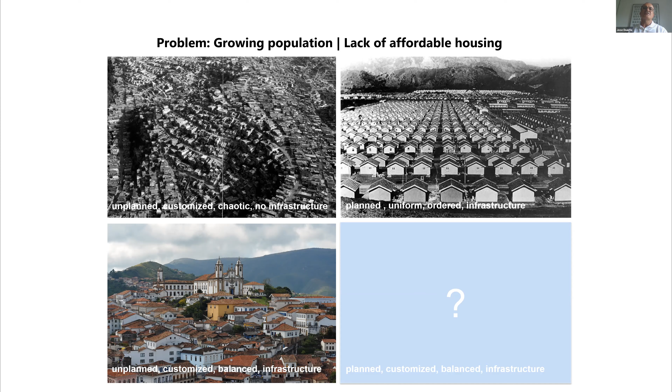So what we would like to have is actually what you see at the bottom on the left side, which is that we would like to build settlements with the qualities that we perceive and value in the settlements that grew incrementally over time. So what is the solution? How can we design environments that have the richness and work well like these historical settlements that become very often touristic attractions? So this slide shows the DNA code, which is the code of life.

And the idea is if you tweak the code a little bit, you end up with a different living creature. And the idea is that this does not happen randomly. It happens in a way that the creatures evolve to become the fittest to the environment where they live.

So this is the idea that we want to bring into architecture: the code to generate buildings that are the fittest for the environment where they are built.

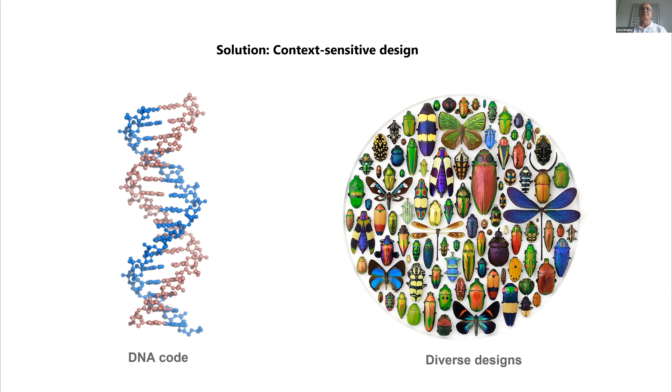It just happens that this is not new. If you look back into the history of architecture, you see books written, some of them thousands of years ago, where people describe very rigorously how to design buildings. This is done in such a way that it's more or less straightforward to convert those instructions into computer programs able to generate 3D models of a building.

So what you see on the screen is actually the output of a computer program that some of my students wrote a few years ago that converts a famous book on architecture, written by Vitruvius, a famous Roman architect 2,000 years ago. He has one chapter that describes how to design Roman theaters.

So what the computer program does is, if you specify the number of spectators, it will generate in a matter of seconds a 3D model of a theater according to Roman rules for that number—for 5,000 or for 15,000, for instance. So we have a computer program able to generate customized designs. Then we use digital fabrication, or in this case rapid prototyping, to very quickly produce a 3D physical model of the output.

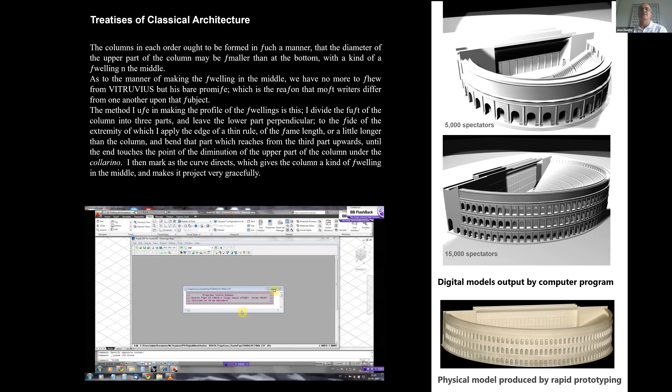So this is basically what we are advocating to solve the problem of building many houses in a short period of time, customized to satisfy the requirements of their users. The problem actually requires two systems: a design system that takes information about the context and outputs a design solution, and a production system, as we'll see.

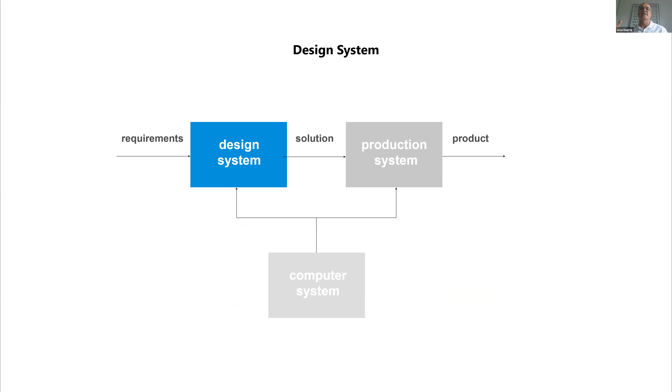The idea is that we use computers, the high processing power of computers, to very quickly process data about the site and generate data about the solution.

If you look more closely into the design system, it has the ability to interpret the context and generate a design brief—we have a system for doing that. We have another system able to generate candidate solutions, and then a system able to rate and rank those solutions. The idea is that we use search and optimization to find the optimal solution for a particular context.

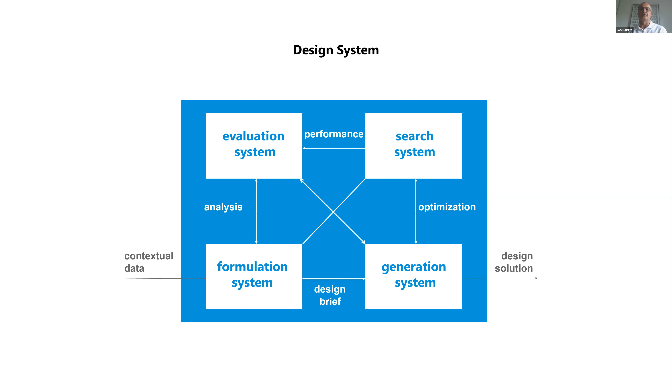In terms of the design of housing, this means the ability for people to design houses themselves. What you see on the screen is an interface we developed at the center a few years ago, an interactive tabletop that anyone can use to design their own customized house.

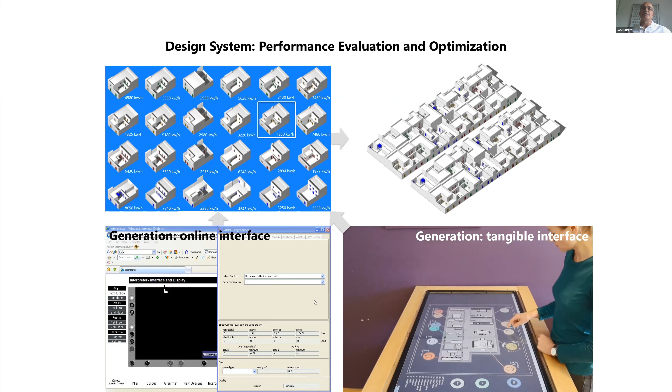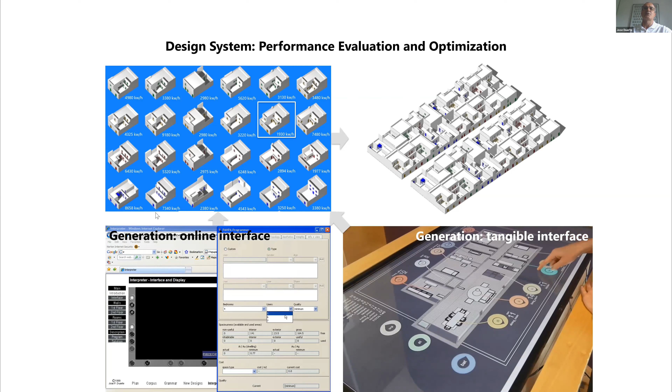The interface can be developed in many ways. For instance, in this case, what you see is another type of interface that runs on the web—like a virtual architect that asks you questions and will generate a house. With these systems, you are able to generate customized houses.

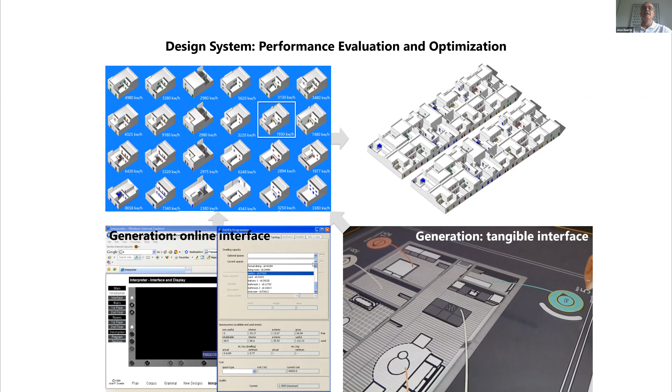This particular system has the ability to generate 67 million different houses. This means you can create very diverse environments—you have some of the qualities you value in informal settlements, but at the same time you can guarantee they will have infrastructure and public spaces.

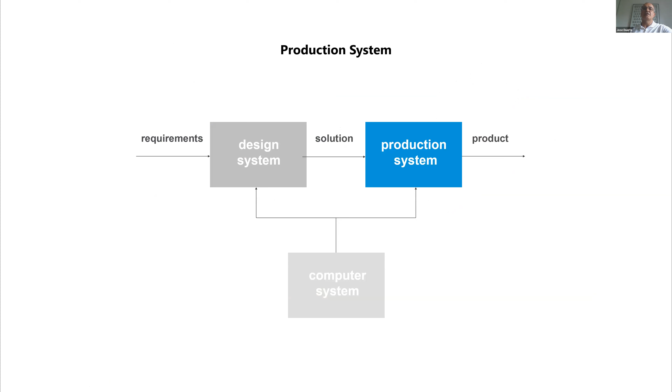So once you have the ability to generate customized solutions, you also need tools to materialize them—you need a production system. The idea is to use digital fabrication and digital construction to very quickly, efficiently and rigorously materialize those solutions.

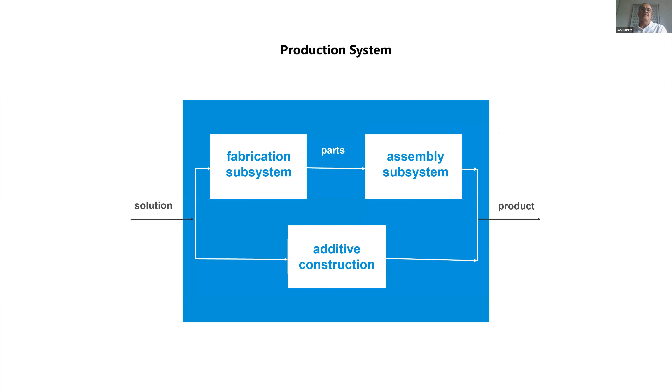These systems can take at least two forms. In one, you have what we call a kit of parts: you produce standard components and combine them in different ways to assemble the house. There's another, more modern solution—to use additive construction to very quickly print the building, as we will see. So these are the two paradigms: the kit of parts, combining standard components into different houses in different ways.

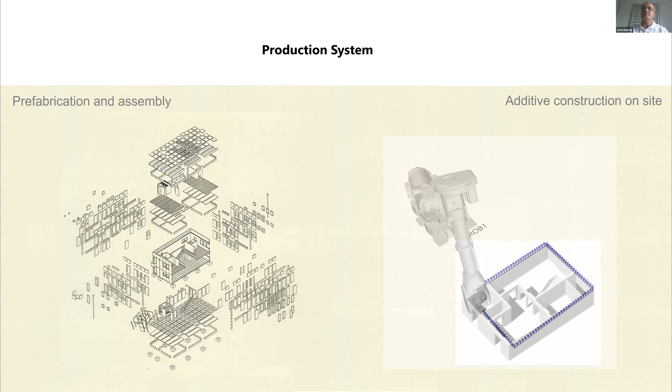And the other one is to use a robot to print the house—large scale 3D printing. That's basically what we have been developing.

This is quite interesting because you can use this strategy on many different scales—to design the house, the urban environment, but also the materials. For instance, in this particular case, you see a system we developed to design what we call a functionally graded concrete. If you look at human bones, their density is not homogeneous; they are denser when they need to be stronger.

This is the idea we use to develop a customized building component. Concrete has a binder, usually cement, and aggregates, usually sand. But you can replace part of the sand with a lightweight aggregate, and therefore change the properties of the building component. So it can be stronger and heavier where it needs to be stronger, or lighter and have higher thermal insulating properties.

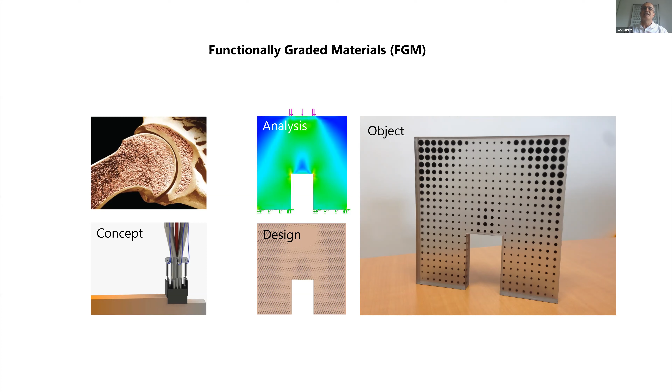So what you see in this image is actually a customized wall. You see it's denser where the loads are stronger and lighter where they are smaller. And then we developed the system to be able to materialize this.

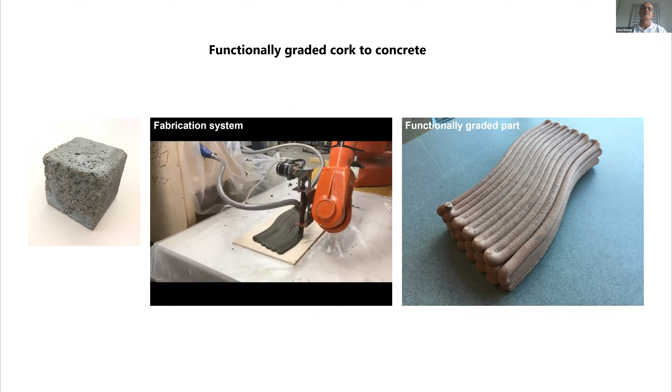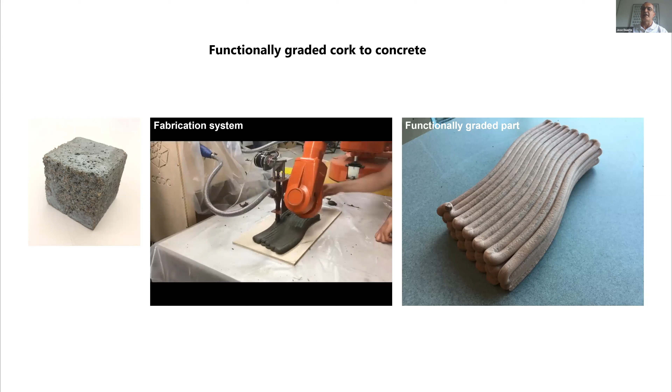What you see here in this animation is the printing of functionally graded concrete. The concrete being printed is not homogeneous, it does not have the same composition. The composition at each point is customized so it performs its function as best as possible. On one side you see it's 100% sand as aggregate; on the other, part of this sand was replaced by cork granules.

So you can also design a customized material. A colleague of mine, Shadi Nazarian, developed the ability to transition seamlessly between concrete and glass. This means you can actually have windows without frames, which simplifies construction, decreases the number of trades required to build a building, and decreases cost while increasing efficiency.

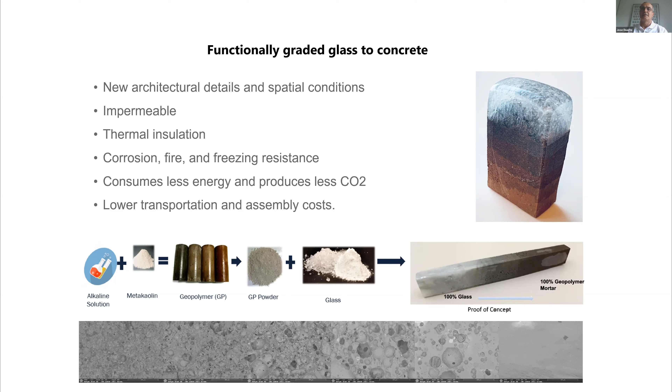But printing in concrete is a very complex endeavor. There are many different variables associated with different parts of the system. You have variables connected to the environment, like air temperature and humidity, and variables connected to the composition of the concrete we are using.

And then their properties, like viscosity, flowability, setting time, and so on. You also have variables connected to the printing system, like how fast you print, the size of the nozzle, and things like this. Because the material and printing system constrain what you can do, you also have variables associated with the design.

So the printing system constrains design, but at the same time it allows you to print concrete buildings without formwork, which makes construction a lot cheaper and faster. So there are many advantages in doing that.

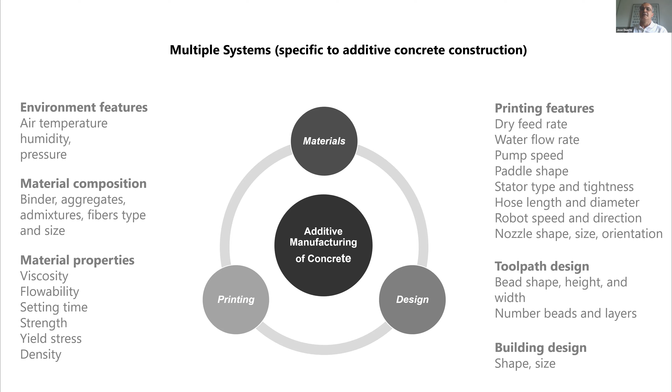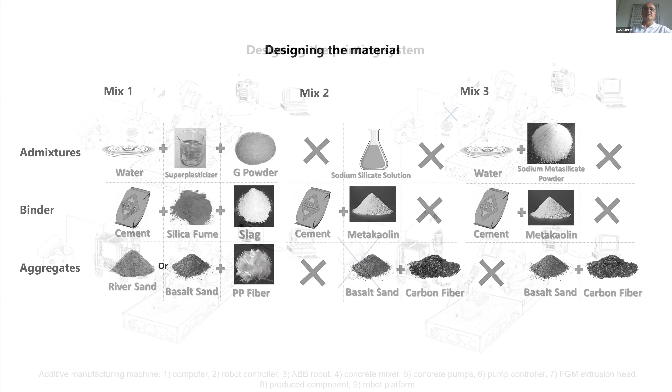This is exactly what I've been doing at the Additive Construction Lab. We are developing different concrete mixes that are printable for 3D printing. We are developing the printing system so it can take different configurations. And we are also understanding how the material behaves once printed, because concrete is not like plastic that hardens very fast.

Concrete takes some time, so when it's deposited, it deforms. We need to model this deformation so that we end up with a part matching the design we wanted. So we need to compensate for material deformation to get an accurate shape.

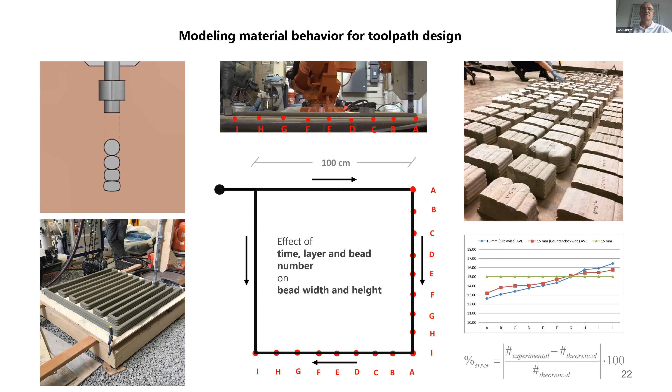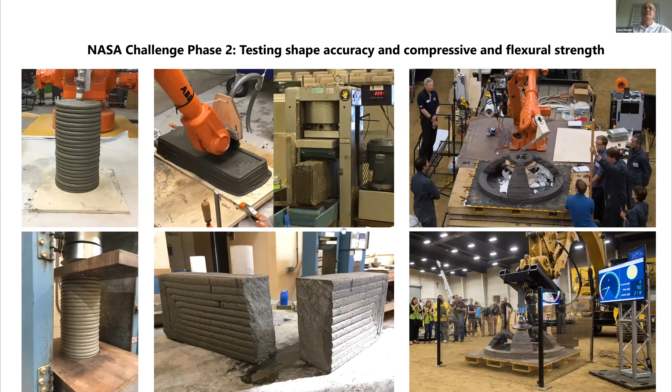This is another stream of research. You need to make sure concrete has the right strength so it will not collapse during or after printing. We also need to develop the ability to make it completely sealed, and the ability to incorporate openings like we see in this case, where another robot is used to place the window frame during printing. We need the ability to introduce reinforcement and make sure the concrete can endure successive freeze-thaw cycles.

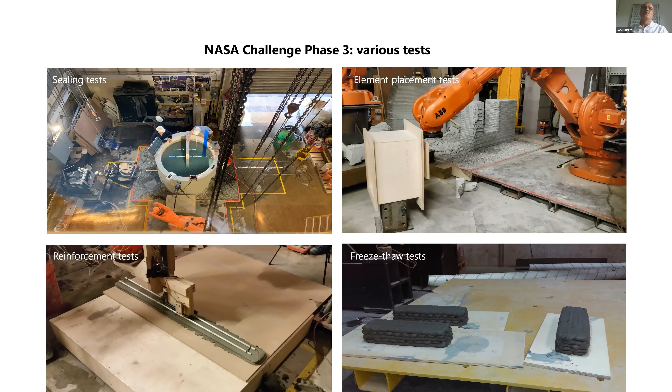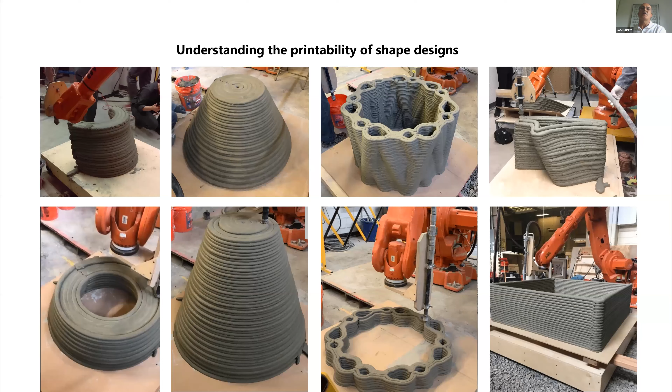We also need to understand which kinds of shapes can be 3D printed without formwork, because this does not work with any shape. There's a correlation between the features of the system and the features of the design, but what you can do is still a lot. The class of shapes, the variety of shapes, is actually very large. So this is also what we are trying to understand: what are the possible forms, and how can we best take advantage of the printing system in concrete to make buildings. We are developing the technology to avoid formwork, just to make construction simpler and faster.

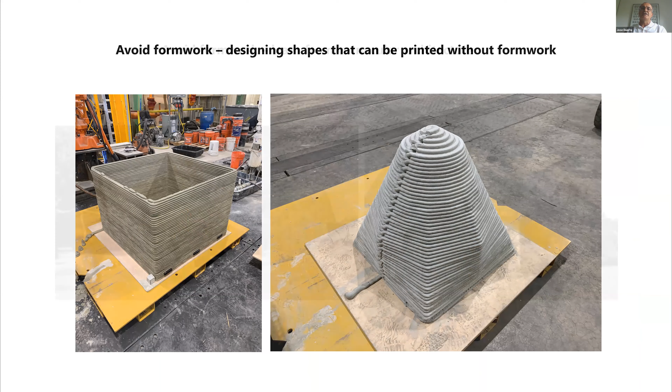So what you see in this case is actually a dome shape, a fully enclosed structure that was designed and built by one of the students of the class that we teach about the technology. And if you look back into vernacular architecture, the architecture built by people over time, you see that they had to deal with similar constraints.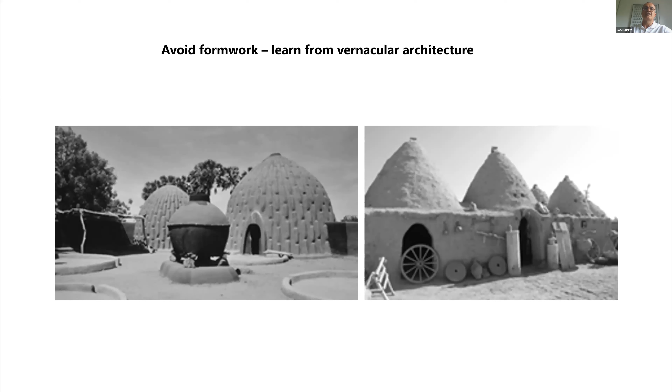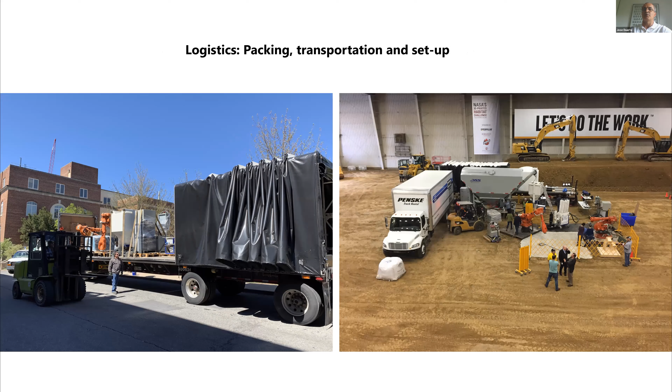What we're trying to understand is to learn from history, to find out which kind of shapes we can build and design. And because we are talking about moving to different places, we also need to be concerned with logistics: how to pack the system, how to actually set it up on site so it works efficiently.

So a few years ago, and last year, we participated in a NASA competition whose goal was to design houses for Mars that were 3D printed. It had two parallel streams: in one, we had to design the system for Mars; in the other, we had to use the same system to build on Earth. So what did we do?

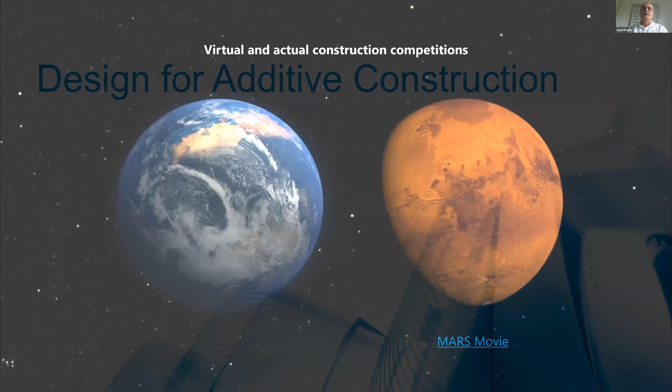We developed a platform that uses BIM. BIM is a standard of the industry, Building Information Modeling, and there are software built according to these standards. Our system has the ability to generate different solutions, and we are using parametric design for doing that.

Then we need to check the performance of the solutions from different viewpoints: structural, environmental, and constructability. And then we need a system to find the optimal solution for the context, the one that works better. Because we need to articulate the work of different robots, we need to do construction simulation to make sure they don't collide while printing.

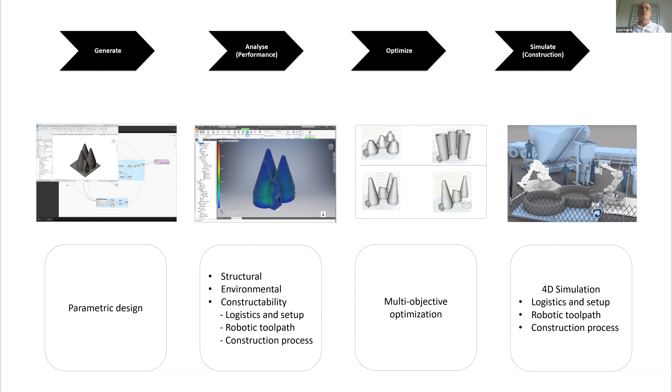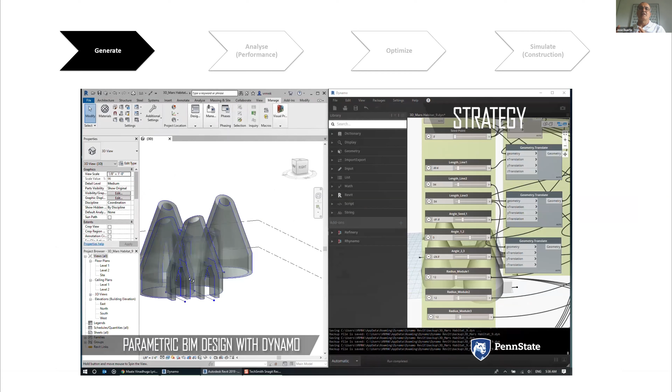So what you see here in this slide is the system showing how you can use parametric design to design shapes, different configurations for the shelter. We developed a design system based on modules, and those modules incorporate the rules of 3D printing. The constraints are imposed by the printing system and the material we're using for printing, and that limits what we can do, but it's still a very large range of possible solutions.

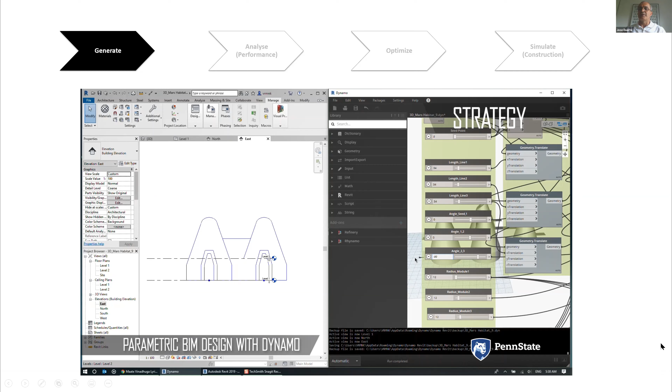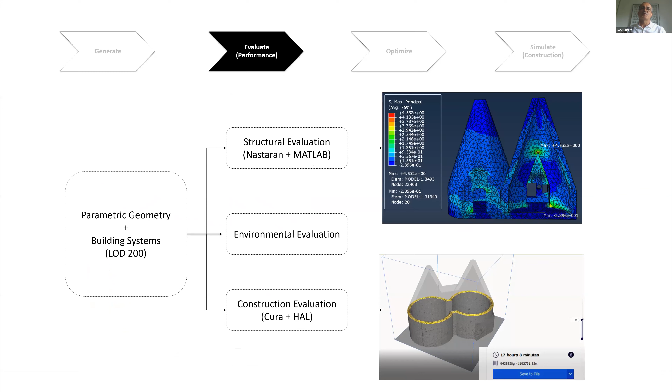So you can get the solution, and then check its performance from the structural viewpoint, the environmental viewpoint, or the constructability viewpoint. And then you can use optimization to actually find the optimal solution.

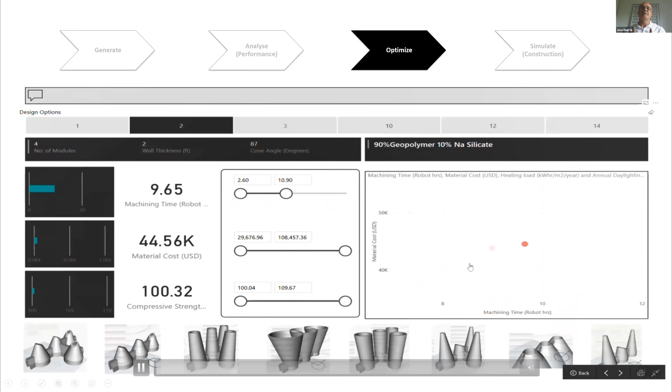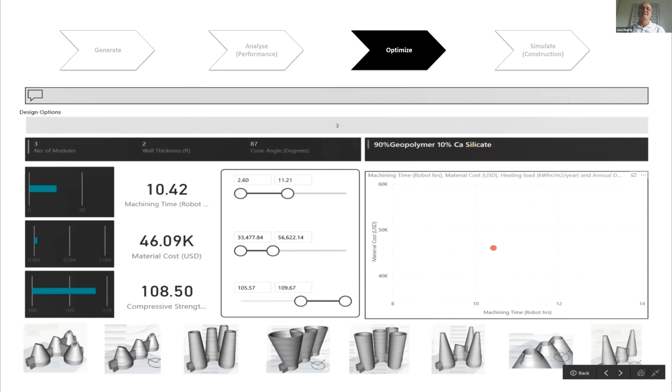So what you see in this animation is the system at work. It goes through different cycles, generates different candidate solutions, checks them, and evolves to the next stage until it finds the solution that's best for the particular context.

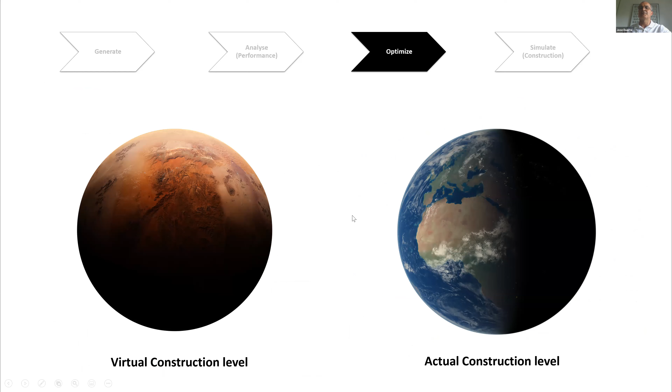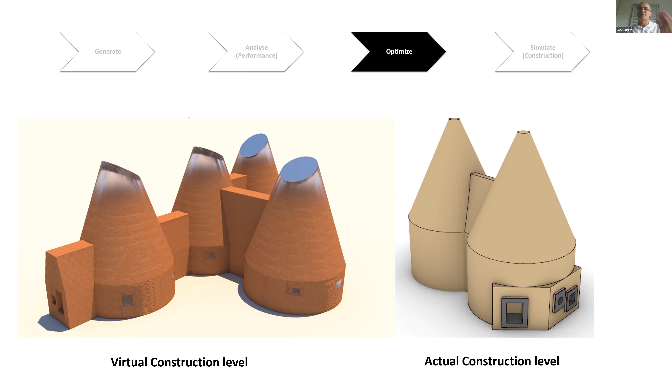Because we are using the same platform to design for two totally different environments, as you can guess, the outcome for Earth is different from the outcome for Mars. The same system generates different buildings because gravity, atmospheric pressure, and so on are different on the two planets. On Mars, the gravity is much lower, so we need to be more concerned with lateral loads because the structure needs to be pressurized, whereas on Earth the vertical loads are more important. So that's why the buildings have different shapes.

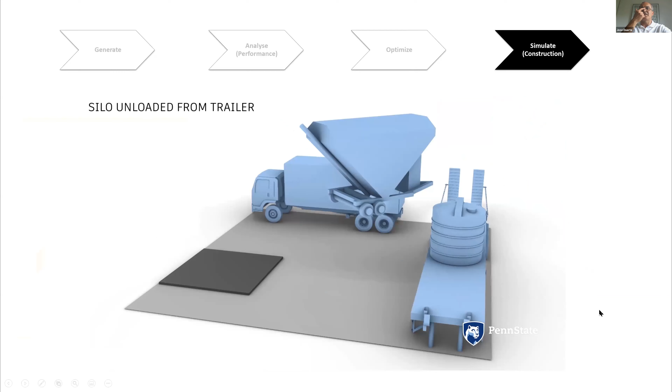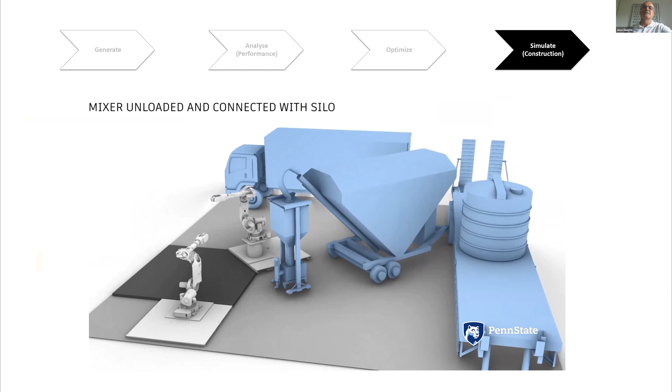So what you see now in this animation is the simulation of the setup, because to qualify for the final stage of the competition, we had to show that we could print. This is the animation we submitted to show how we were thinking about printing the structure on site, and there were constraints like the maximum area we could occupy.

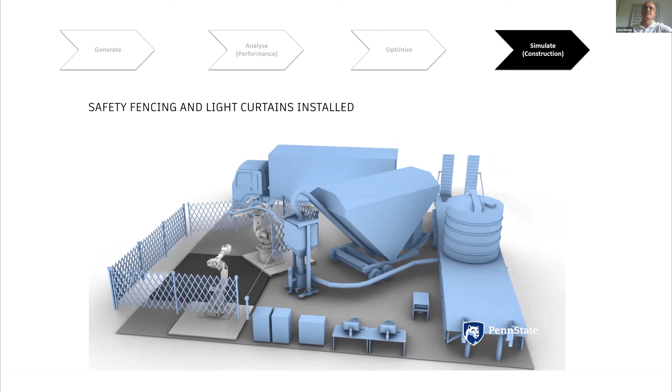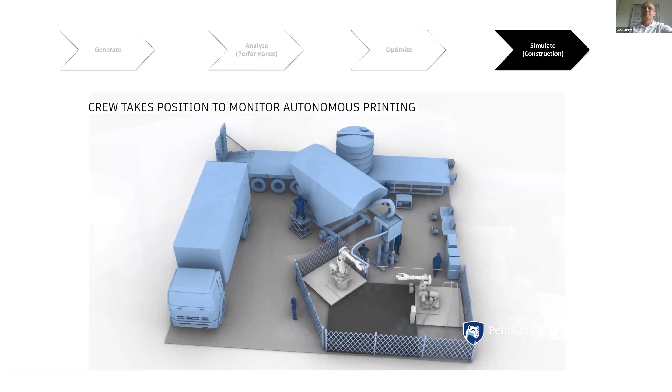So what you see here is the printing system. And what we are doing now is developing a product that can be used by industry, benefiting from the research we developed for the NASA competition. So you see the simulation of the setup, and now a simulation of the building being printed before the actual competition.

This was done for the virtual competition. You see that the second robot will place the windows at some points -- I think it's going to happen now, as you can see -- and then it continues printing.

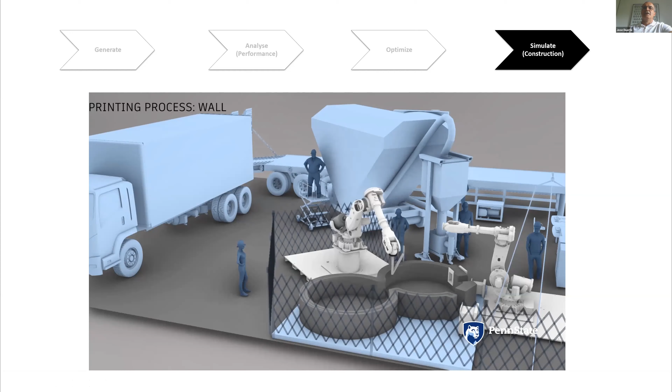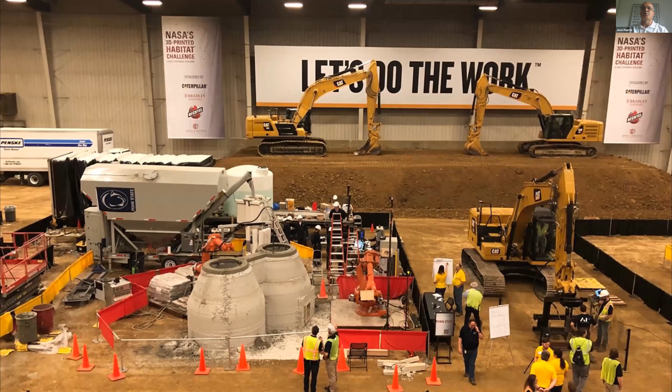Some of my colleagues are Sven Bilen, Shadi Nazarian, Ali Memari, Randall Bock, Aleksandra Radlinska, and Nick Meisel. So it's a team of seven faculty and many graduate students working together, and they embody what I think is the spirit of Penn State: multidisciplinarity, working collaboratively to develop products that no one alone could develop.

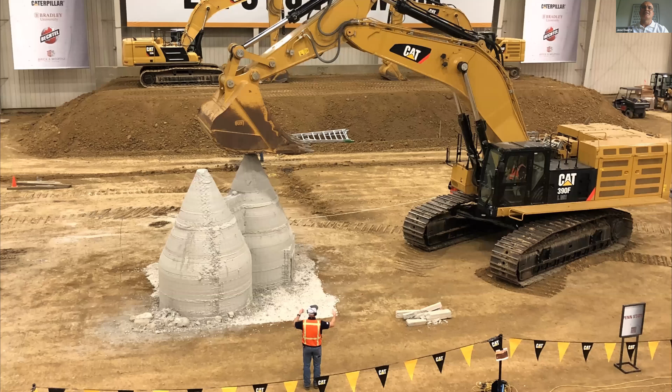Because at the end, it needs to resist. So you need to develop something that's resilient, that can resist the forces during its use.

So how can we learn from these efforts and design more resilient cities? We know we are going through what we call a pandemic. And if you look at the data, you see that the disease did not spread at the same rate in all places—there are cities where it actually spread faster.

So what we are doing now is analyzing how the disease spread in these cities to find a correlation between urban features—such as density, public transportation patterns, the shape of buildings and how they're organized, the street grid, and walkability—and the patterns of disease spread.

What we want to do next is learn that correlation and find out the best design to prevent diseases from spreading so fast. We want to use this information to design cities with more adequate features—more resilient cities. Thank you very much for your attention. I'm now open for questions.